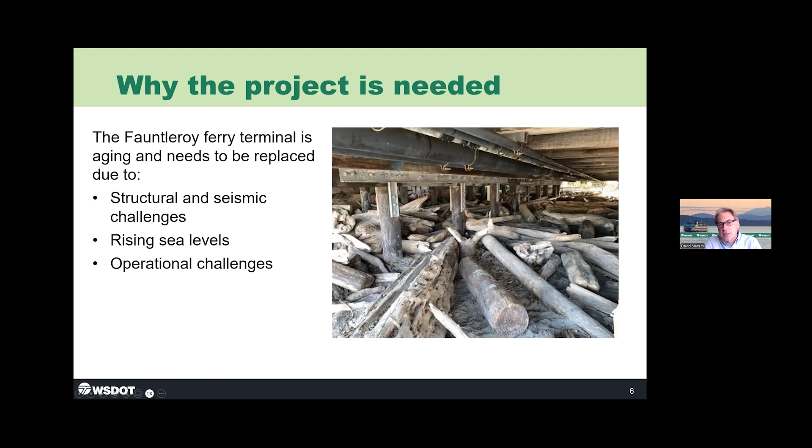I want to take a quick point through this photograph that's on the screen here and illuminate some of the things that you don't see from up top when you're parked in your car, but the actual condition of the facility. You can see in this picture there are a number of steel connections that have been added on or retrofitted to the existing piling and the joists that support the decking. There's a lot of debris on the beach, and you'll see in this photo that it clearly is a problem, banging up against the utilities underneath the facility. So if you ever get out to Cove Park and wander around and peek underneath the dock, you can see firsthand the age, the vulnerability, and the condition of this aging dock. And like an old car, it definitely needs to be replaced.

So the next slide here, we're using a process called the Planning and Environmental Linkages process, which we call PEL for short. This is an early planning phase that helps WSF identify transportation issues, environmental concerns, the community's values, and economic goals early in the project planning. So we are currently in what we call level 3, that part of the screening process Marcia will talk about here in a little bit. But in this process, we're considering things like traffic conditions, cost estimates, permitting requirements, a little bit about constructability, and things that will make the terminal safer and more efficient for everybody.

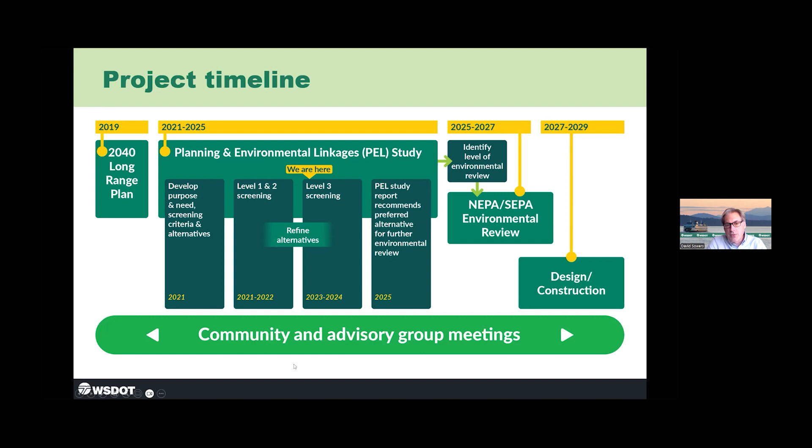With input from the community, we're also studying Good To Go and advanced ticketing, which is something we're looking at as a pilot project at Fauntleroy. During this phase, the project team is using input from the community and the advisory groups, the executive advisory group, the technical advisory group, and the community advisory group to refine this range of alternatives, a range of concepts that we call alternatives. Later this year, WSF will recommend an alternative that we will then take into the next level of environmental review, which is called the NEPA process. So I'd like to share a little bit more about what that process looks like.

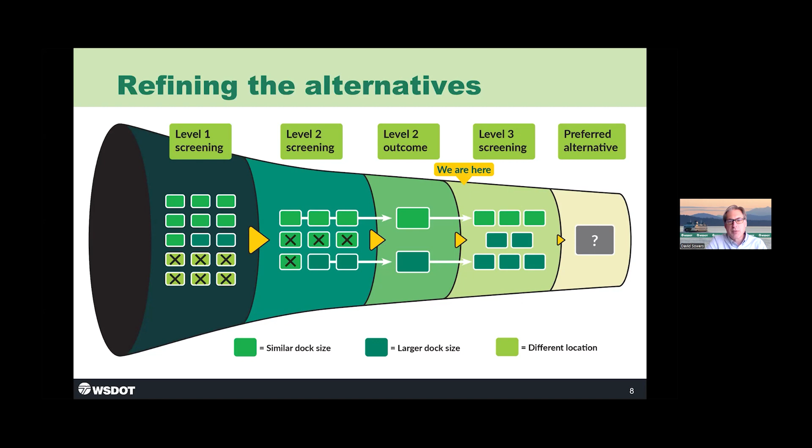This graphic shows how we've narrowed those alternatives down. If you haven't been following along, the level 1 screening took us from around 15 options, including some options outside of the Fauntleroy area, which were screened out. In level 2, we decided on 2 main options, and now we're refining those alternatives before recommending an alternative that will move into the NEPA phase next year.

I wanted to talk briefly about some terminology, specifically the same footprint alternative, which has been bouncing back and forth. WSF considered and eliminated a same footprint alternative during this PEL study, which would be exactly the same size and square footage as the existing dock.

This alternative was a dock that would be exactly the same in square footage, but it does not meet several elements of the project's purpose and need. For example, it does not meet efficient and safe loading and fare processing for pedestrians, vehicles, and bicycles, because the dock would be too crowded for crews to effectively sort and stage all of the freight, ADA, emergency, and priority vehicles, since the dock essentially wouldn't have that available space.

This is especially difficult on a multi-destination route. It also does not provide the operational efficiencies to support reliable service, meeting those long-term projections in our 2040 long-range plan for demand on this route. It includes less space to hold vehicles, equating to longer backups on Fauntleroy Way, and again, an inability to sort traffic destined for 2 locations.

Finally, it does not improve the multimodal connectivity. It doesn't enhance the customer's experience or accommodate ridership growth. For those reasons, this option did not meet the project's needs.

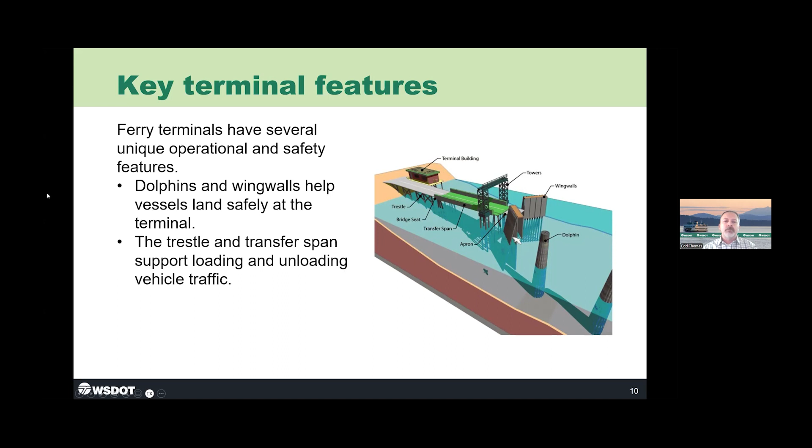Some common features of the new terminal: there are several key features consistent across all alternatives. Replace the dock at the same location, accommodate 186 vehicles between on-dock and Fauntleroy Way holding, meet seismic design standards and accommodate rising sea level, space for large trucks to safely navigate, wider lanes and space for people walking, rolling, biking, and driving motorcycles, more space for operations, a new terminal building, dedicated drop-off and pickup area for passengers with disabilities, a larger toll plaza with 2 toll booths, and minimal dock widening near the shoreline.

In addition to these features, as Dave mentioned, we're also studying Good To Go advanced ticketing, and other features like overhead passenger loading, and working with our partners at Seattle Department of Transportation to consider changes to the intersection.

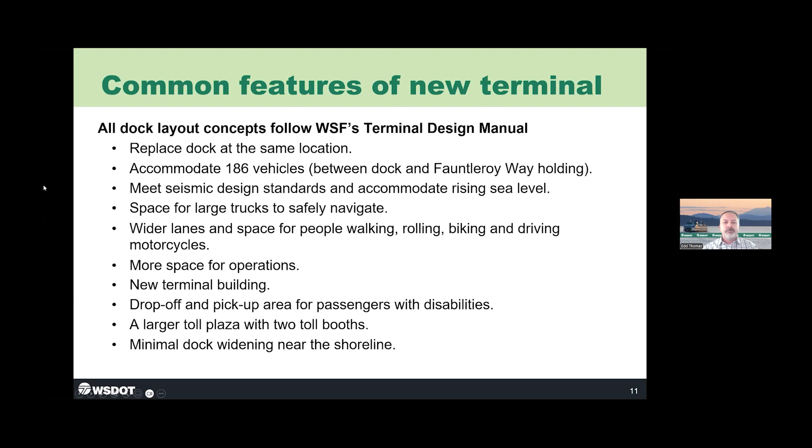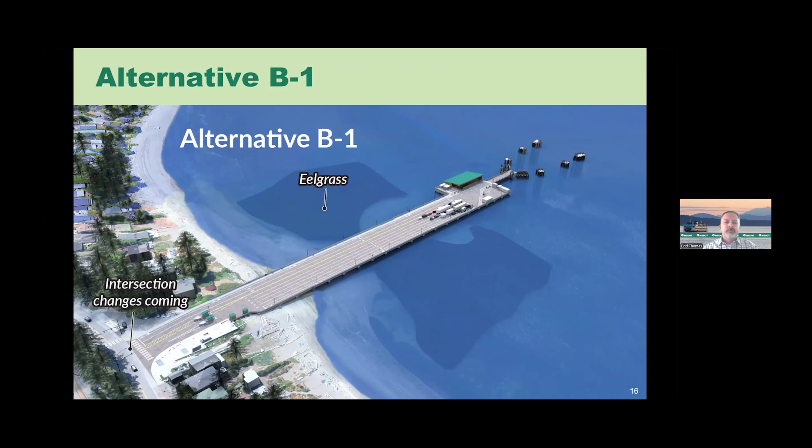This first option, alternative A, replaces the dock at the same size as the current dock and maintains the existing wing walls and dolphins, which are the in-water structures that help guide the ferry into place and protect the dock. This concept is slightly wider than the current dock to provide space for a large vehicle to navigate the dock and provide space for pedestrians, cyclists, and vehicles.

The dock capacity is 76 vehicles, fewer cars than the current dock. The dock width is 85 feet. The length of the pedestrian walkway is 850 feet, and it has 4 holding lanes.

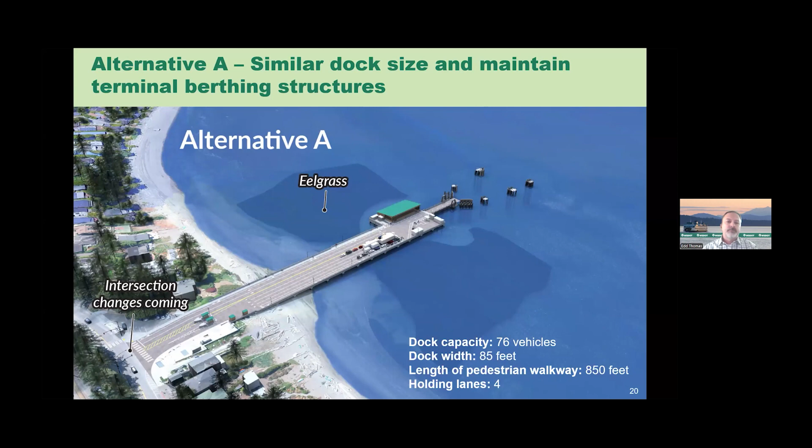Alternative A1 is similar to alternative A, but includes new dolphins and wing walls. This option is slightly longer and holds the same amount of vehicles as the current dock. Current dock capacity and capacity of A1 is 84 vehicles. The dock width is 85 feet. Length of the pedestrian walkway is 905 feet, and it has 4 holding lanes.

Alternatives A2 and A3 are variations of alternative A1 that have the same layout as alternative A1 and include good to go and advanced ticketing as A2, or only advanced ticketing technology as A3.

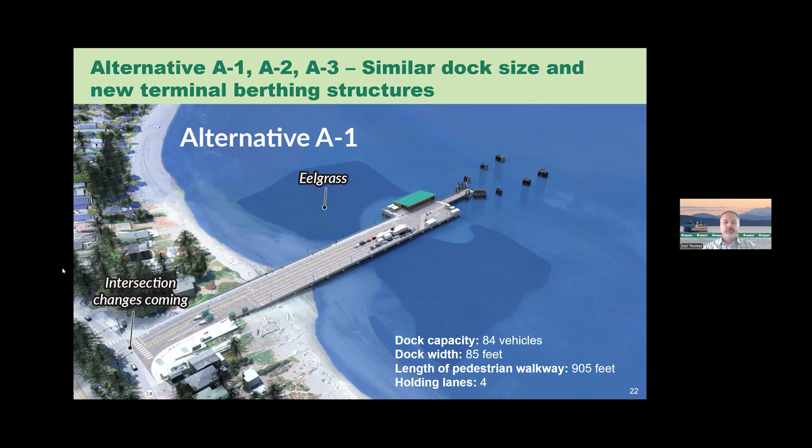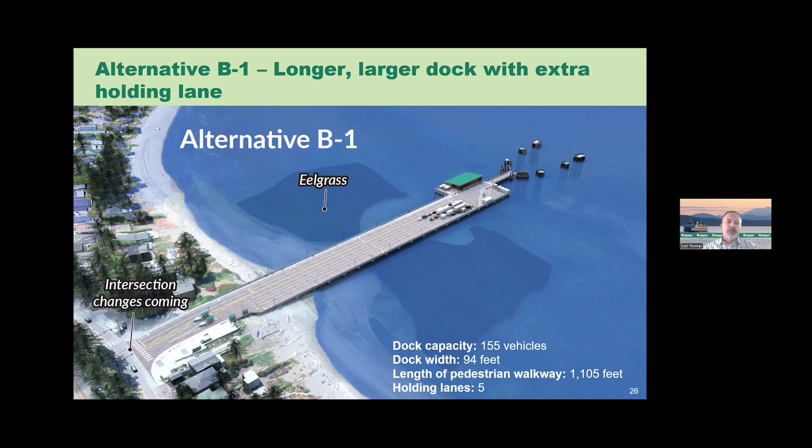Alternative B1 is the same length as alternative B and includes 1 extra holding lane on the north over deeper water to minimize impacts to Cove Park and environmentally sensitive areas closer to shore. This dock capacity is 155 vehicles. Its width is 94 feet, and the length of the pedestrian walkway is 1,105 feet, and it has 5 holding lanes.

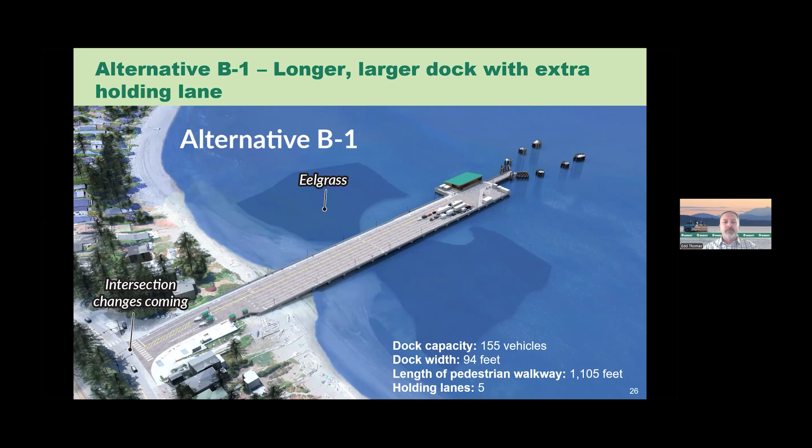Alternative B3 is the same configuration as alternative B2, is slightly shorter than alternative B2, and includes 1 less holding lane. The rest of the design features are the same as alternative B2. This dock capacity is 124 vehicles. Its width is 66.5 feet near shore and 93 feet over deeper water. The length of the pedestrian walkway is 1,090 feet. It has 3 full-length holding lanes and 2 half lanes.

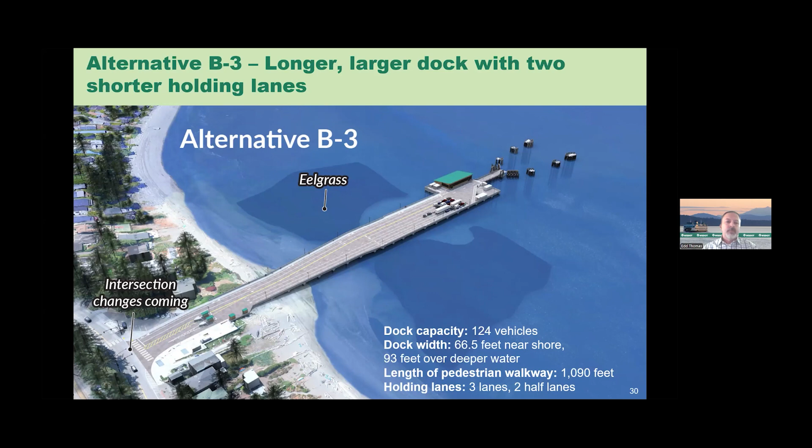And the final alternative, alternative C, is the same configuration again as alternative B2 and adds a full-length holding lane on the north side of the dock. This dock option can hold 186 vehicles, removing the vehicle queue on Fauntleroy Way Southwest on most typical days. Its width is 85.5 feet near shore and 112 feet over deeper water. The length of the pedestrian walkway is 1,105 feet. It has 5 holding lanes, full-length holding lanes, and 2 half lanes.

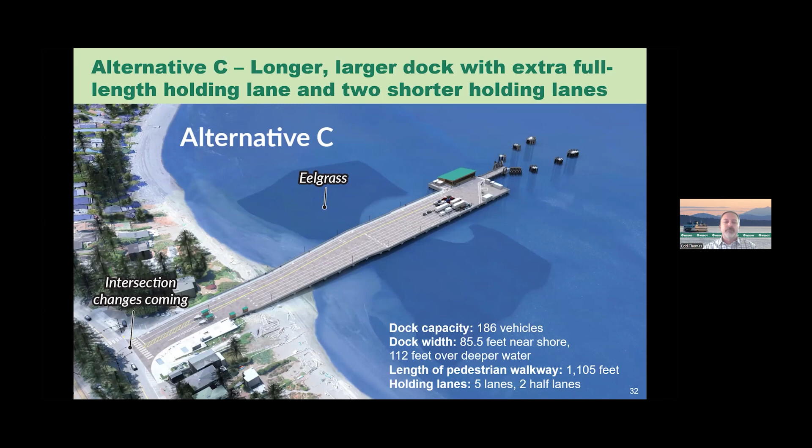And with that, I'd like to pass it over to Charlie to review some visualization graphics.

Hey, thanks, Ed. Hi, everyone. My name is Charlie Torres, and I'm the project manager for the terminal replacement project.

We have developed design renderings to help you better visualize the differences between each alternative. Please keep in mind these show conceptual finishes based on Washington State Ferry's new Mukilteo terminal. The intent is to show the dock footprint and general layout for each alternative. We will seek community input on the look and feel of the terminal later on in the design process.

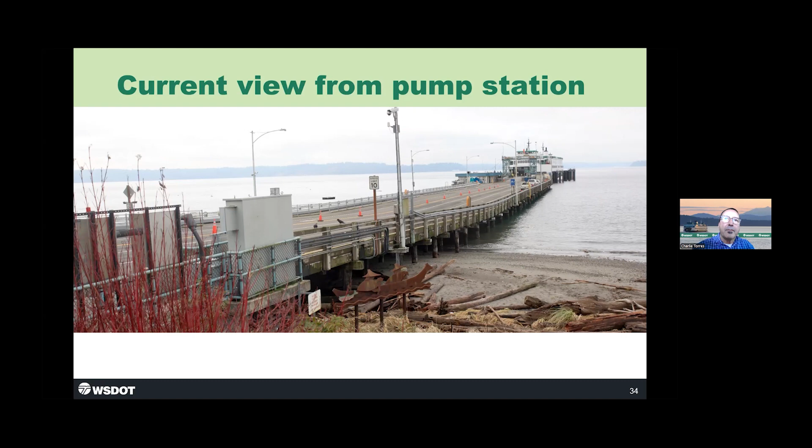This first image of the current dock is taken from the King County pump station. These renderings help show what each dock option looks like near Cove Park.

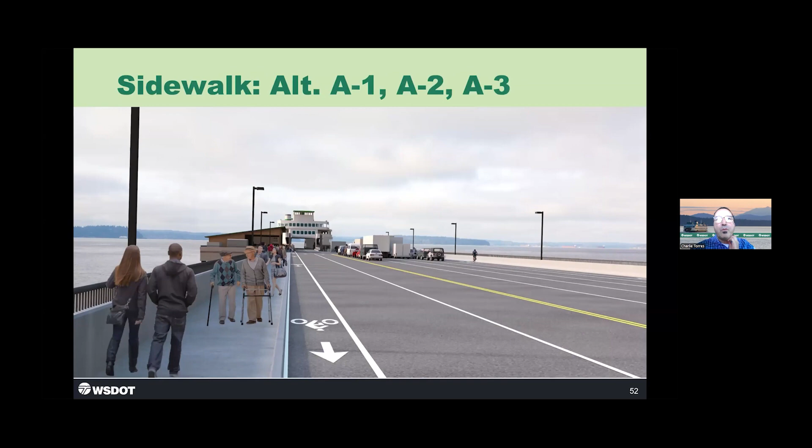This next view shows the existing walking path and what the pedestrian pathway and dedicated bicycle lane look like. The walkway is 7 feet wide, the same as the current dock.

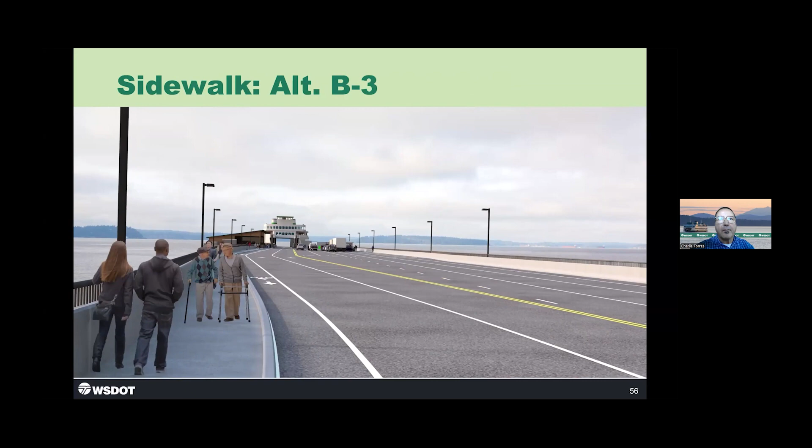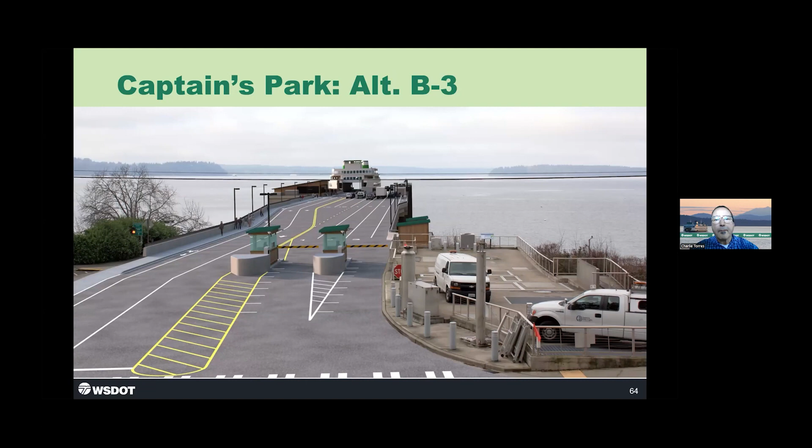To address one of the key needs for the project, improving terminal efficiency and faster ferry loading and unloading, Washington State Ferries will improve the intersection of Fauntleroy Way Southwest and the terminal at Barton Street Southwest. Washington State Ferries is working closely with agency partners, specifically Seattle Department of Transportation and King County Metro, to plan an improved intersection configuration that includes a traffic signal.

These improvements are needed for any alternative selected and will be needed during construction of the new terminal. Washington State Ferries will begin intersection improvements ahead of the larger terminal replacement project. We will share more information as plans progress.

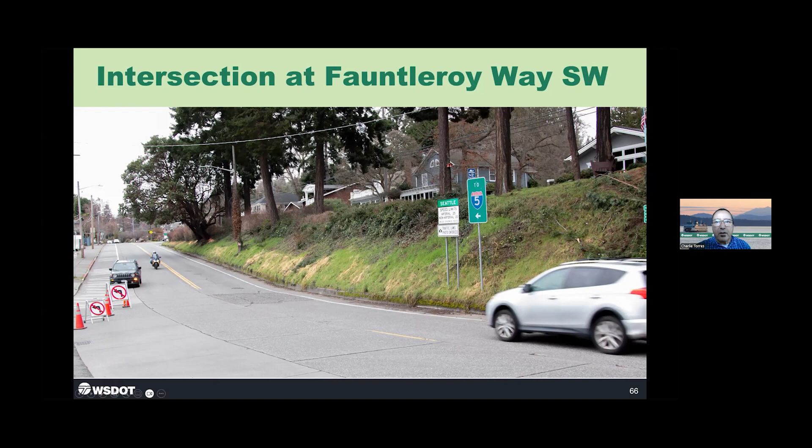Now let me pass it off to my colleague, Marcia Tolan, to talk to us about permitting and environmental issues. Thank you, Charlie. I'm Marcia Tolan with Washington State Ferries Permitting and Environmental Lead.

There are eelgrass beds to the north and south of the trestle, and then there's a high concentration of kelp to the west of the ferry slip. There's no eelgrass or macroalgae in the area around the end of the dock, where propeller wash from vessels creates a scour hole. There's Fauntleroy Creek, which flows under Fauntleroy Way Southwest, and then under the dock and into Puget Sound. Fauntleroy Creek provides some essential spawning habitat for coho salmon and for coastal cutthroat trout.

The trestle itself, the facility out there for the terminal, is supported by 430 creosote-treated timber piles, and they are aging. The dock includes more than 1,000 tons of toxic creosote-treated timber, a known water pollutant. The density of the timber piles also influences the flow of Puget Sound tidal waters and Fauntleroy Creek near the trestle, how that moves, and how it can cause debris and driftwood to collect under the trestle and on the shore. This makes it difficult for fish to pass to and from Fauntleroy Creek.

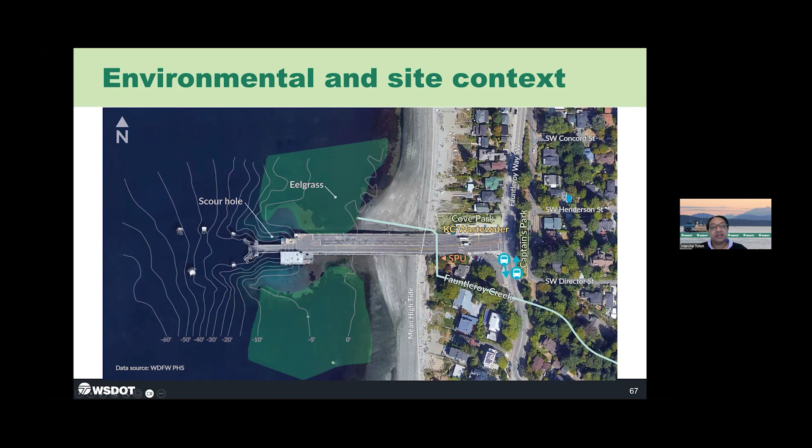To move closer to recommending an alternative that we move forward with, we'll conduct a level 3 screening process similar to how we did the level 2 screening. We developed these criteria based on our project purpose and need statement, which was extensively reviewed by our advisory groups. It's important to note that in partnership with our advisory groups, we refined the screening criteria we used in level 1 and level 2 to develop our level 3 screening criteria. The screening process is much more detailed for level 3 and uses more specific metrics. This list includes the general categories we're using for level 3 screening of alternatives. To view the full list of screening criteria, please visit our online open house.

So listed here are the screening criteria categories, and they include meet requirements for structural reliability, accommodate projected sea level rise, and the metric for that is resilience, improve operational efficiency, the metrics are minimized dwell time, process vehicles more efficiently, maintain on-time performance. Reduce the number of conflict points between traffic modes, and the metrics are safety of vehicles, bicyclists, and pedestrians.

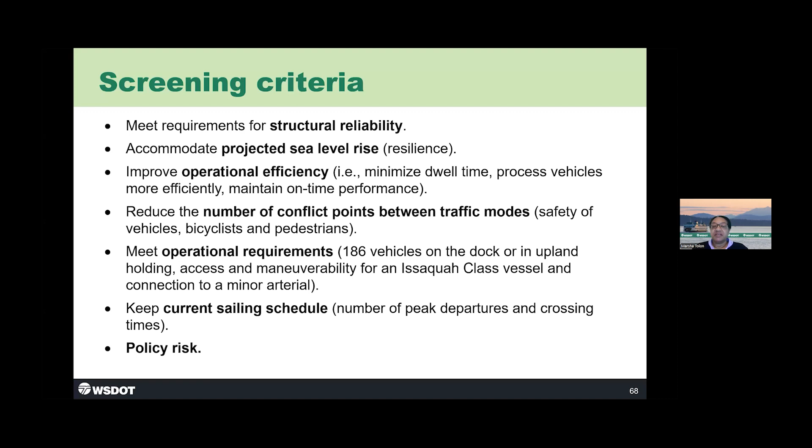Then to meet operational requirements, those metrics are 186 vehicles on the dock or in upland holding, access and maneuverability for an Issaquah Class vessel, and connection to a minor arterial. Keep current sailing schedule, and the metrics are number of peak departures and crossing times, and then policy risk. Next is enhancing multimodal connections, which is to connect to transit or allow for growth in walk-ons, people biking, and van pools.

Then to avoid changes to parks and recreational areas, and these are usually known as Section 4(f) and 6(f) properties under the National Environmental Policy Act regulations. And then recreation, and at the state level, it's projects that are funded by the Recreation and Conservation Office. Then requires changes to traffic circulation on local streets in the ferry terminal area.

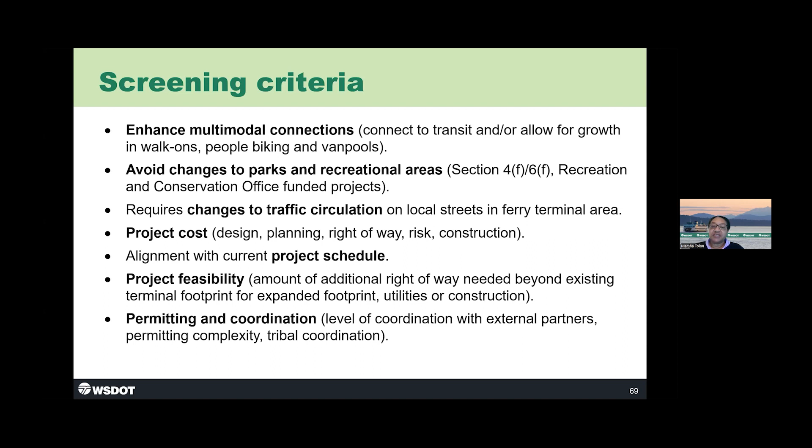Project cost, and those metrics are design, planning, right-of-way, risk, construction, alignment with the current project schedule, and project feasibility, amount of additional right-of-way needed beyond the existing terminal footprint for an expanded footprint, for utilities or construction. And then finally, permitting and coordination. This is the level of coordination with external partners, permitting complexity, and tribal coordination. I'll hand it back to you, Hadley.

Thanks, Marcia. So we're now at the time in the meeting where we're going to take your questions. I see already some questions have been submitted, but if you joined us late, we're taking questions and comments in the Q&A box, which is in the Zoom toolbar at the bottom of your screen. And in addition to the presenters that you heard from already, we have two other panel members that are ready to answer your questions. Mark Bandy is a member of our consultant team, and he's leading all the traffic studies and traffic information. And then Trevor Sharp is with WSF's operations department. So they're both going to also be available to answer your questions. So go ahead and put any questions or comments you have in the Q&A, and we'll just get started.

The first one, Mark, is for you. When you are thinking about the traffic signal, will it be timed so that an entire vessel can unload without vehicles queued on the vessel?

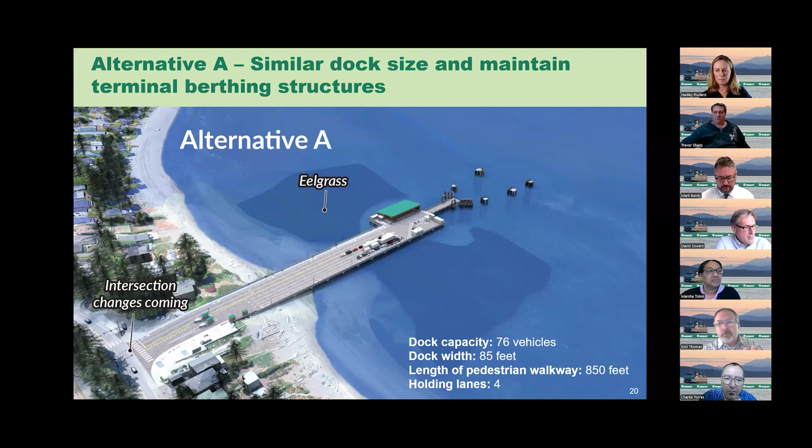As we get into the other alternatives, A1 moving forward, they increase incrementally in length of where the new bridge seat needs to be placed based on the trestle, and it pushes the berthing structures, wing walls and dolphins, into slightly deeper water. So that will require longer lengths of piles, and so it would result in new berthing structures for those alternatives.

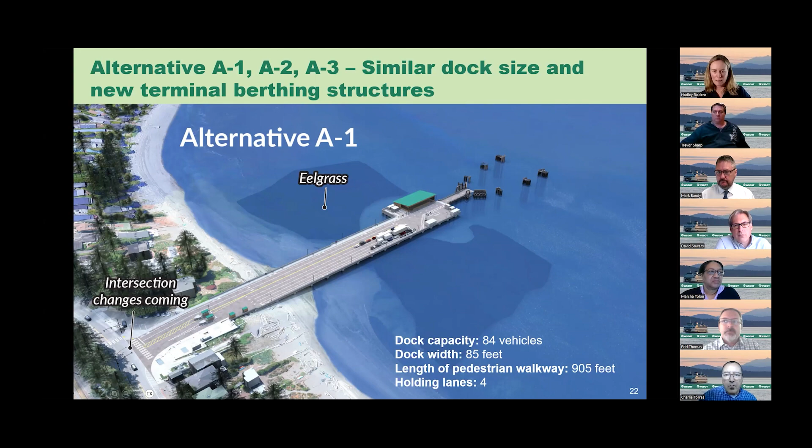Thanks, Ed. Mark, as part of this project, are there any anticipated changes to roadway improvements on Fauntleroy Way north of Lincoln Park or outside of the terminal area itself? We have not identified anything beyond the intersection improvements at this time. Along those lines, a question we received last night at the community meeting was about changes to the holding lane and how it's signed and restricted. And I'll just share the answer we provided last night.

As part of our traffic analysis work, we will be sharing information on what that might mean for length and frequency of how far the holding lane is occupied along Fauntleroy Way. It'll help us all understand that. Down the line, depending on which alternative is advanced, that might lead to a discussion with the city and the community about the holding lane, what times it's in place versus its extent, but we don't know that yet, obviously. But that's the only discussion item that's not right at the intersection itself.